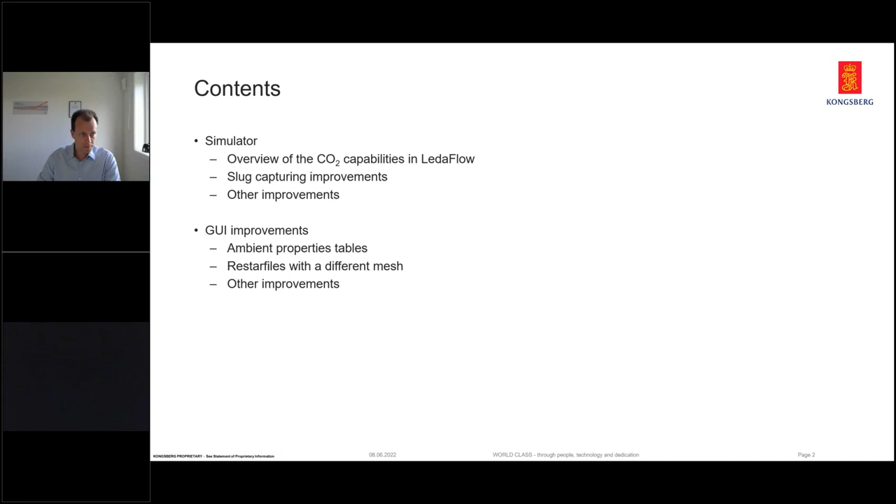Okay, the reason that I'm talking about CO2 here is that recently we've decided to commercialize all of the work done on pure CO2 simulation, which is coming from a research project called CO2FACT. So the objectives of this JRP were to qualify multi-phase flow software for CO2 transport and injection. And also, as part of this, we have begun to extend LedaFlow to CO2 with impurities, but that is not commercialized yet. So maybe next time you can hear about that.

So this project revolves around a series of very interesting experimental campaigns for both pure CO2 as well as CO2 with impurities. These experiments consist of a lot of multi-phase flow experiments at steady state with many different inclinations, both uphill and downhill, which is quite interesting. There are some experiments about phase change by different means.

So the facility that was used for these experiments can be heated up and cooled down by different means. And also some experiments were done using a choke valve that also resulted in phase change. So there's a lot of focus on the mass transfer there. Some experiments around shut-in and restart were done. There are some experiments around depressurization to the atmosphere, fluid hammer experiments, and finally some displacement experiments.

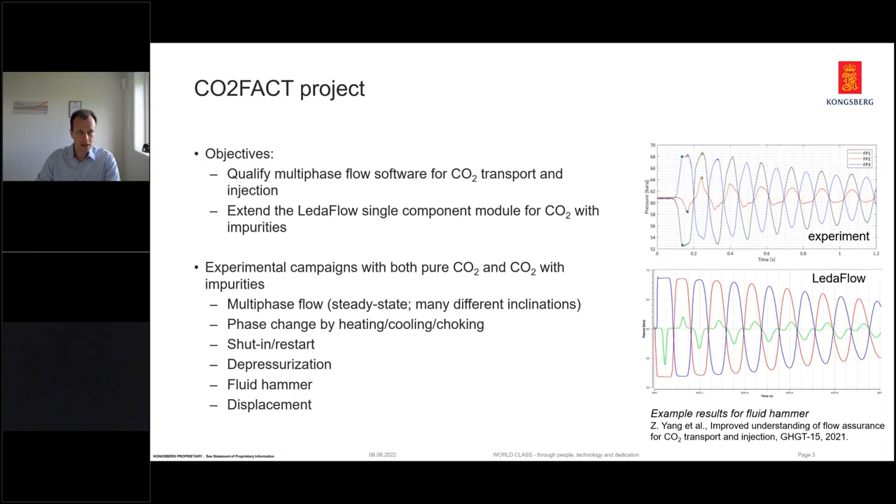Okay, so let's get back to why we are doing CO2 simulations with LedaFlow. What makes LedaFlow suitable for this? Well, first of all, the thermal equations in LedaFlow have always been formulated in terms of enthalpy. So we conserve enthalpy. We don't have equations that are based on temperature, which is good because this is the only universal way of solving this that works for any kind of composition, whether it's an oil composition or natural gas composition, it doesn't matter. Pure CO2 is also fine. So this is fortunate for us.

Then LedaFlow has a volume conservation equation. So that means that both the volume and mass are always converged at the same time, fully implicitly, which is important for fast transients, like for example this fluid hammer case that I showed earlier. We are using Multiflash in LedaFlow, which means that through Multiflash we can support many different equations of state, like Span and Wagner for pure CO2 or GERG for CO2 with impurities.

And finally, LedaFlow contains what we call the non-equilibrium mass transfer model. So that means that only the flow into the pipe network, so that's the boundary conditions, is flashed in the dynamic mode. But basically what that means is that we don't do any flash calculations inside the pipe. And that also means that any discussion on whether to use PT or pH flash calculations is irrelevant for the dynamic model.

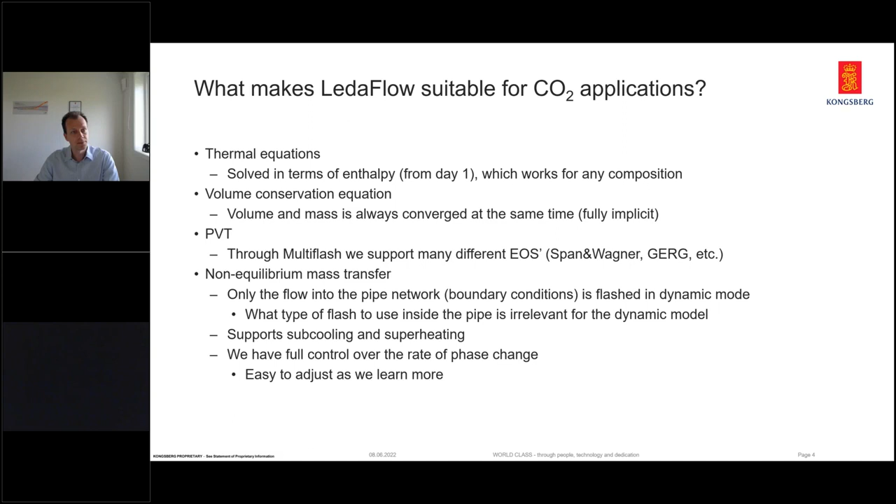Then a little bit about the single component module. This is not only used in LedaFlow for CO2, but it's also in use for steam water systems. As a matter of fact, that is what it was developed for originally. Originally this was implemented for SAGD applications, which means steam injection into the ground. Then later it was used for steam transport pipelines, for instance, the steam network underneath the streets of Manhattan in New York. And now we're using this for pure CO2 pipelines and injection wells. So all of this technology is shared.

The special feature of this single component module is the mass transfer term, which is different from what we use for PVT tables and other composition tracking applications. The mass transfer is a true phase change for a single component system. It will be limited by heat transfer rather than diffusion, which is logical because if you have 100% CO2, diffusion does not play a role anymore. So heat transfer takes over as the limitation. This heat transfer rate is hard-coded in order to improve convergence because we don't really have a good model that does a better job.

We have independent mass transfer terms for the dispersed phases and across the large-scale interface. Large-scale interface here means between the continuous gas and the continuous liquid phases. And the user has the option of tuning the rate of phase change to match experimental data, which was used during the CO2 project.

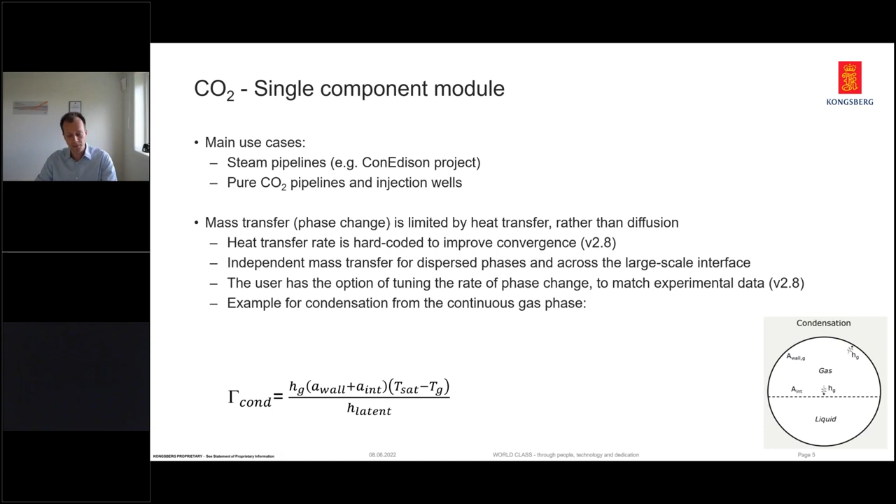In terms of solver strategy, we ran into some issues when we tried to simulate some of these experiments in the project. CO2 cases can be very difficult to converge, which is not really a surprise, but we found out exactly why, which was quite interesting. One of the reasons we had to work on numerics was that pressure and temperature were tightly coupled, especially around the Widom line in supercritical conditions. So even in single phase supercritical conditions, with no phase transition, it can be very difficult to solve. For instance, the density can change around 50% over a few degrees Celsius if you go from liquid-like to gas-like supercritical fluid. So that is one thing we have taken into consideration.

The second one is that the mass transfer term I just showed you depends strongly on temperature. So for both of these very different reasons, we needed a stronger coupling between the mass and energy equations. To explain that, let's first go through the standard solution in LedaFlow, which works very well for oil and gas applications, so there's really no issue there. That is the standard scheme shown in the left figure.

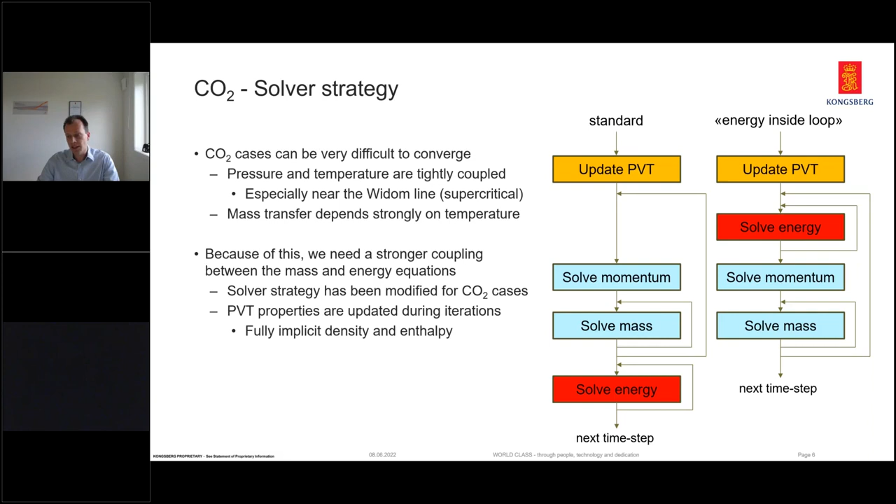Okay, enough about CO2. There's also some very nice other improvements in 2.8. So, for instance, on slug capturing, a lot of work was done on the slug bubble velocity in risers. As it turns out, the slug bubble velocity that was predicted by slug capturing in LedaFlow 2.7 matched really well for short risers.

For instance, the experiments that we have from the Tiller laboratory, the large-scale loop there, which is about 50 meters tall. So there we had a really good match using slug capturing, but it proved that the slug bubble velocity was too low for longer risers, which is exemplified by the unit cell model, which we know gives good results for long risers. So basically, we have a deviation for longer risers.

So this has been improved in LedaFlow 2.8 by doing two things. First of all, we've corrected the slug bubble velocity to better match the unit cell model, which improves things for long risers. And then secondly, we've implemented a transport equation for the slug bubble shape, which accounts for the time it takes for the Taylor bubble to reach its final shape. So using this transport equation and the correction to the slug bubble velocity in general, it's possible to have a good match both for short as well as long risers.

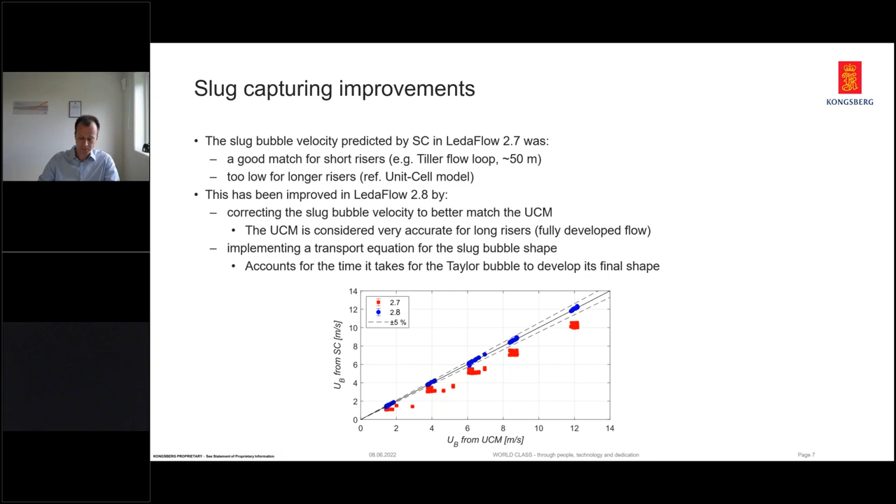Just very briefly, some other simulator improvements. We've also changed the steady state preprocessor. It now uses a pH flash instead of a PT flash. This is in order to enable phase change in steady state for single component systems, for example, CO2. And just as a remark, this is only available if you use Multiflash PVT, so not if you're using GUTS for PVT, which is almost not used by anyone.

We've corrected something for the non-Newtonian fluids. It proved that in the turbulent regime, the pressure drop was not correct. So this has been reworked, and we now have a slightly lower pressure drop only in the turbulent regime for non-Newtonian fluids.

We have added a new option for the leak device to model autonomous inflow control devices. That basically means that we have a leak device where the pressure drop depends on the density and viscosity of the different phases. There's a whole lot of different tuning coefficients, so you can model the exact configuration of the inflow control device.

Multiflash PVT has some more options. So now we have a fallback option in case LedaFlow doesn't support a certain equation of state or any other option in Multiflash. It's possible to let Multiflash read the Multiflash file that contains the fluid configuration. It can be read directly by Multiflash, so that is quite useful as a fallback.

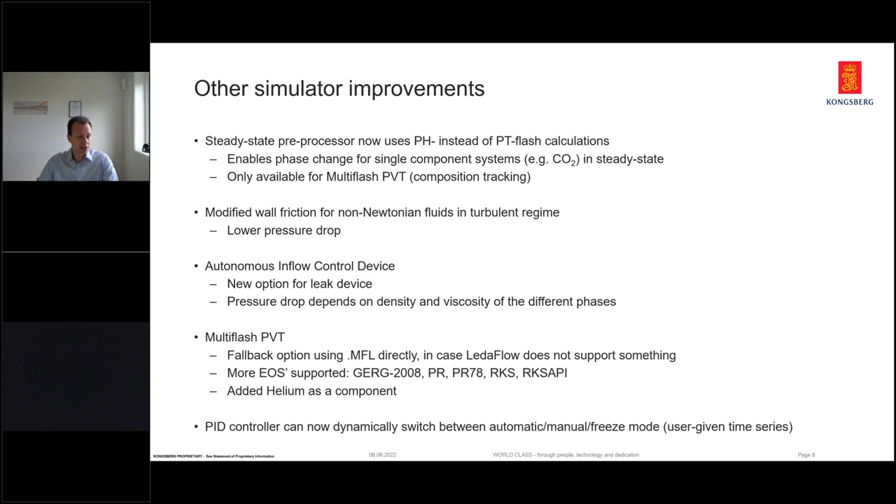Okay, I would like to finish this presentation by showing some of the improvements that we've made to the user interface and the workflow in general. So first of all, we've added the option of defining what we call ambient properties, which are just tables containing the ambient temperature and air-water velocity around the pipe as a function of elevation.

Previously it was necessary to define these variables along the pipe as a function of the pipe length, which is kind of convoluted. So this is a more logical and direct way of doing this. But the main benefit of this is that you can use one table for all the pipes in a network.

So if you have a large pipe network, you can make a single ambient properties table and use it for all the pipes, which makes it much easier to set up, and also it guarantees consistency between the different pipes in a pipe network.

And secondly, we now have the option of reading restart files with a different mesh. So if you're using slug capturing and you remesh your case using a finer mesh, it's possible to use a restart file from a different simulation using a coarser mesh as a starting point, which can lead to quite significant time savings.

Then it's possible to position devices now using true vertical depth, which is mainly useful for wells that are defined in TVD MD coordinates. So this comes in addition to MD as well as length coordinates.